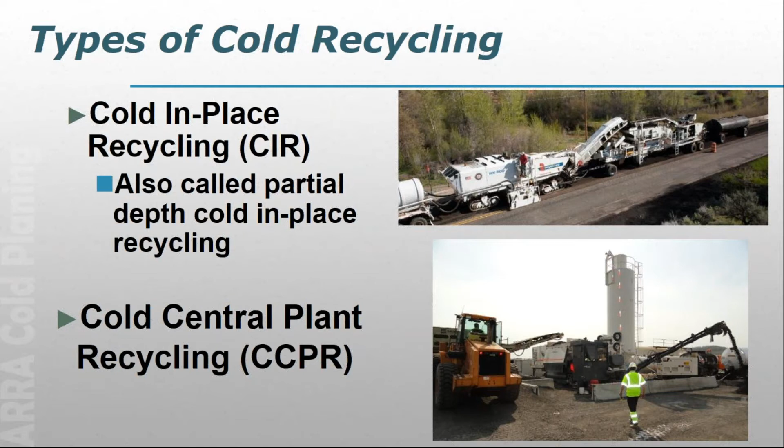With cold central plant, we're taking the RAP that's come off of a road and gone into a central location, and we can process it in a pug mill mixer, as you see down at the bottom, or out west where we have a lot of single unit trains, I've seen them just park a processing unit on the road and process it through there.

So most of the time when I get questions about cold central plant recycling, it's not so much what is the mix, but it's where or how do you use it. So that's really what I'm going to concentrate on in the next few minutes. But with cold central plant, we're going to take clean RAP and we're going to turn it into a new pavement mix. So a couple of keys is I want to keep that RAP clean, properly stockpiled and clean. The quality of that stockpile is going to influence the quality of your product.

More than likely, I'm going to have to crush that RAP. So I want to crush it down to a specified gradation. We're going to mix it with a bituminous recycling agent. It's either emulsified asphalt or foamed asphalt. This will be done at a central plant location. And then we're going to transport it to the laydown area. We're going to place it as a recycled mix.

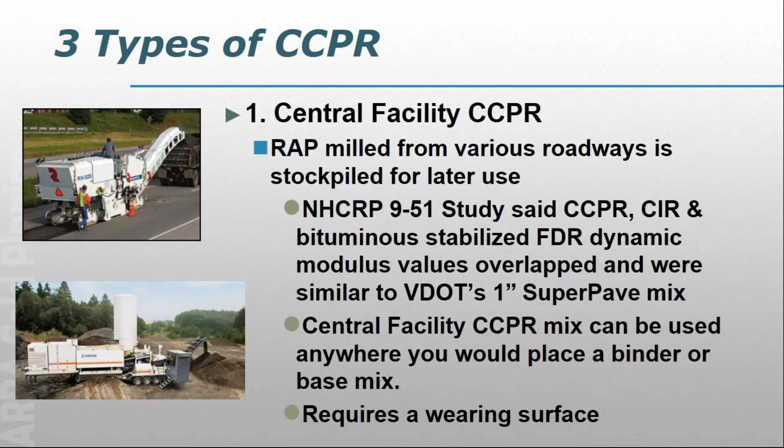We're going to place it just like you would a cold in place mix. Compact it, and like a cold in place recycled mix, it's going to go down a little higher air voids. It's going to need a surface treatment. One of the differences really, it's a little bit easier. You can fractionate your RAP if you want to try to change the gradation a little bit.

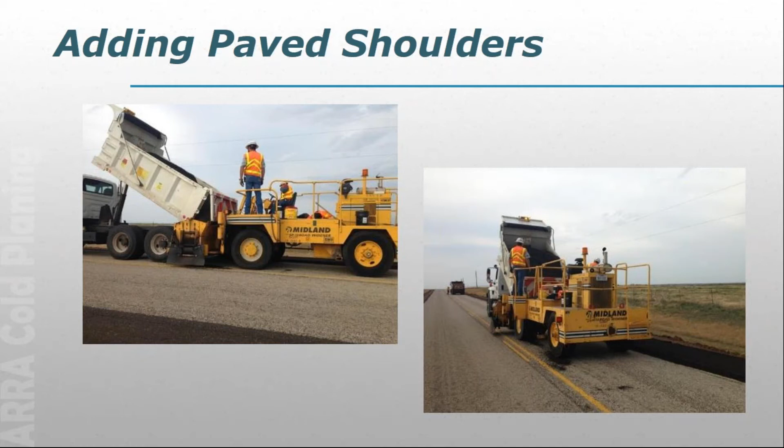You just want to be sure, especially when you're adding uncoated aggregate, that it's cost effective. And so the mix design will give you a good indication as to whether you may or may not need additional aggregate, but adding new aggregate is going to up the recycling agent demands. So you want to be sure that that's cost effective.

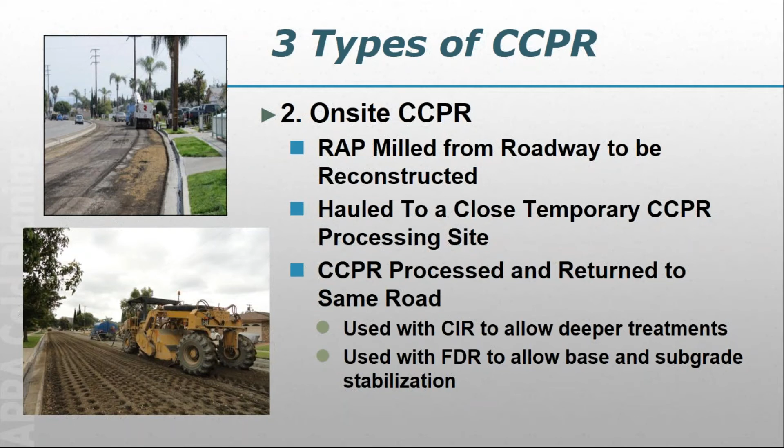There are three basic types of CCPR, so we'll talk about these and talk about where you can use them. The most common by far is what we'd call central facility CCPR. Many asphalt contractors and milling contractors have large stockpiles of RAP. So this RAP has come from various roadways and been stockpiled at their central location for later use. And it's becoming, especially in urban locations, a little hard to put all of this RAP back into hot mix. So CCPR is a really good use of this material.

As far as how does it behave, there was an NCHRP study 9-51 done by the University of Maryland, where they looked at dynamic modulus values of CCPR, CIR, and bituminous stabilized FDR. And their conclusion was the dynamic modulus curves of all three of these materials overlap. So they were very similar, and they also ended up being similar to Virginia DOT's 1 inch Superpave mix. What can you take from that? Well, central facility CCPR mix is going to behave like a binder mix or a base mix.

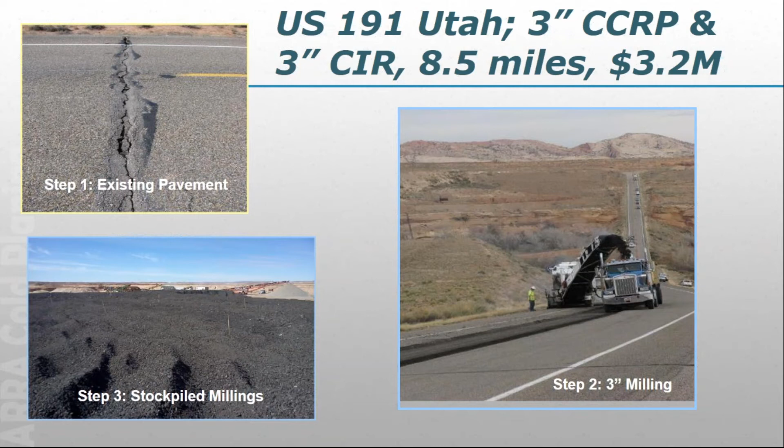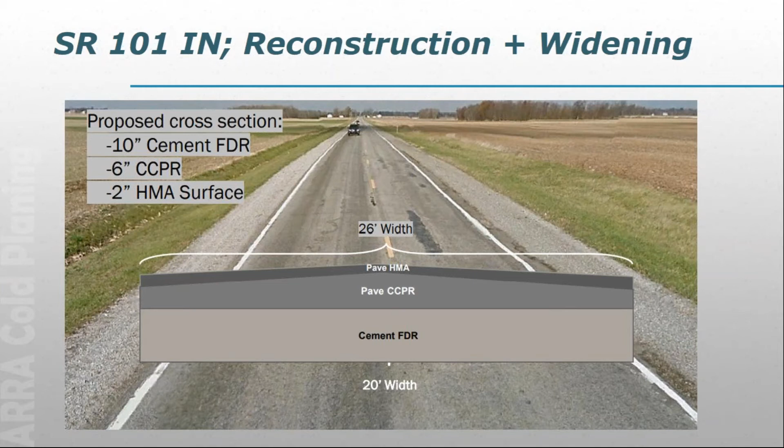So it can be used pretty much anywhere you'd place a binder or a base mix. One other place you can use this, if you have RAP in some more rural locations where you have a lot of gravel surface roads and you want a cost-effective way to upgrade these, you can place a central CCPR mix on these gravel roads, and they'll require a surface course. So depending on the traffic, you can go from a double chip seal or cape seal to an asphalt overlay. But this is by far the most common type of CCPR we use.

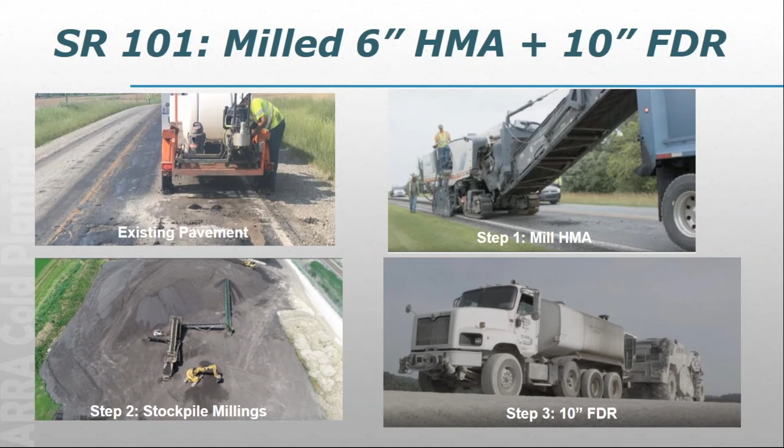Another place it can be used well: there are parts of the country where they built a whole lot of lower volume roads, not only without paved shoulders, but without shoulders. And we've seen this done in my home state. They have a program where they're adding shoulders to the road, and these CCPR mixes make a great shoulder mix. They come in place, very economical to add a paved shoulder to some of these roads.

Another type of CCPR is what we call on-site. There are some places where we can't get in and cold in-place recycle a mix. So we might want to do CCPR. So we're going to take the RAP that's milled from a roadway, the same roadway that's going to be reconstructed. We'll haul that to a close temporary processing site. We'll reprocess it and return it to the same road.

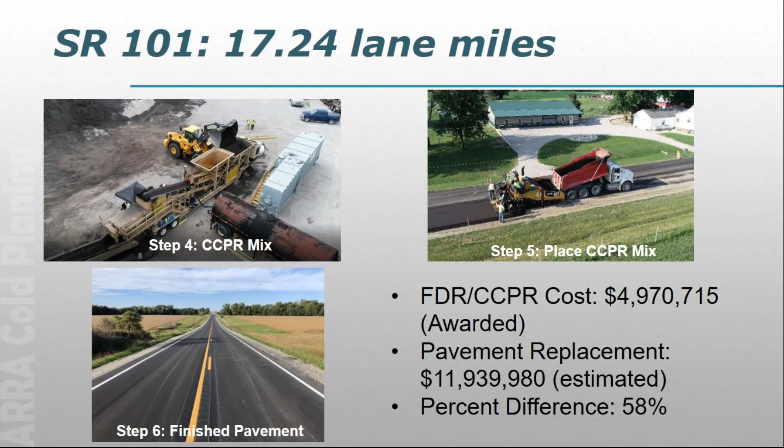We've seen some very innovative uses with this process. I've seen it used with CIR to allow much deeper pavement treatments, allow us to go 6+ inches deep, all in place. And I've seen it used with FDR to allow us to get down and treat the base and subgrade without wasting that asphalt material that we had to mill off to get down to that. So I have just a couple of examples to show you.

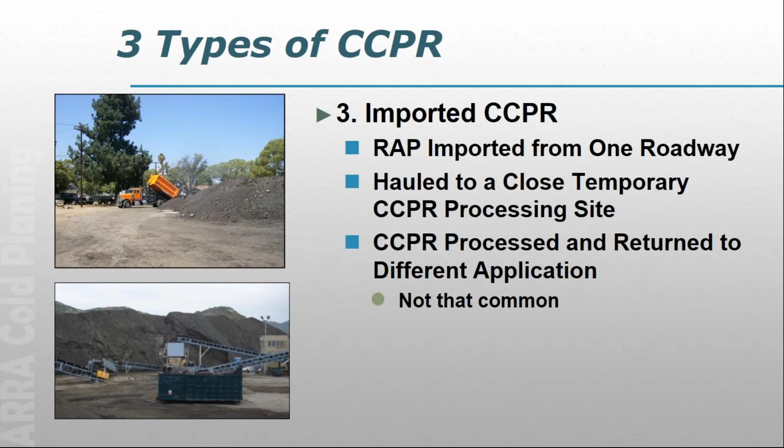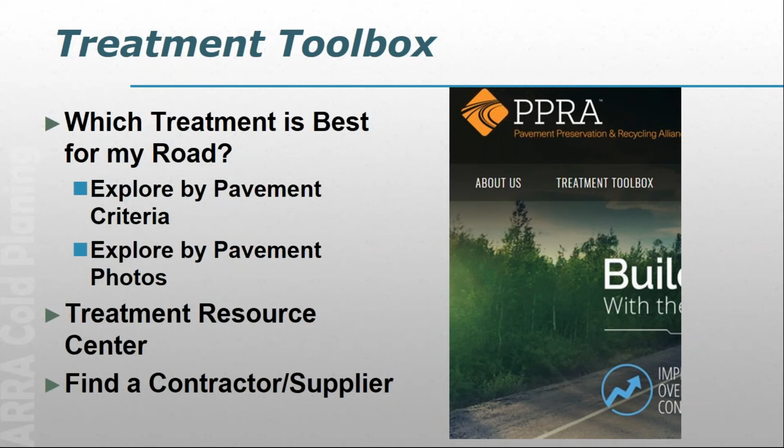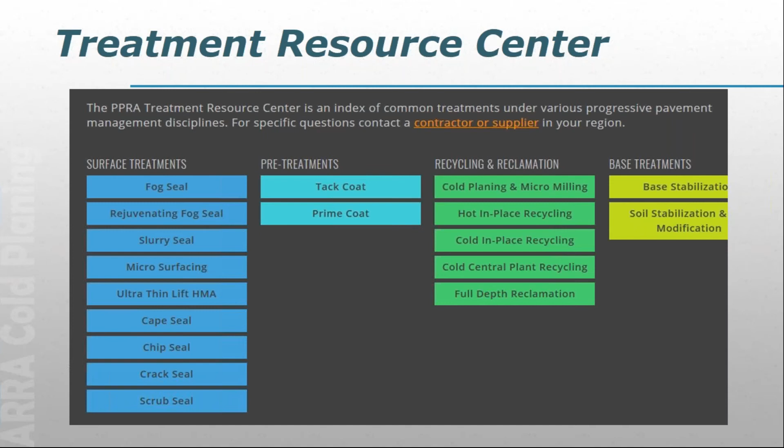This was an award-winning project out in Utah where they had an existing pavement, bad thermal cracks, quite wide thermal cracks. This was quite deep or thick pavement, quite a bit of deterioration occurring along the cracks. DOT came up with some money, a fixed amount of money that they could use to work on this road. So the proposal was to combine CIR with CCPR to allow them to treat 8.5 miles for just $3.2 million and to remove enough of that transverse crack or thermal crack that hopefully it wouldn't return back.

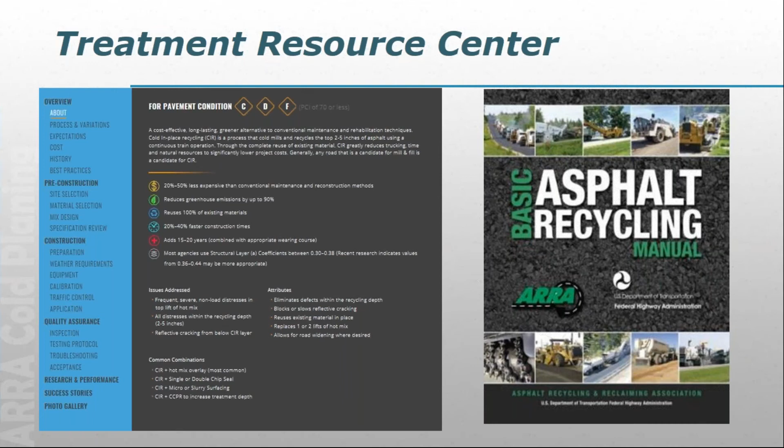So the process, they came in and they milled off the top 3 inches of the pavement and they hauled it to a central processing spot on the site. Then they came in and they performed CIR to another 3 inches. And so then once they finished with the CIR, they went back to the stockpile. They hauled their processing unit from the CIR train and set it up there and produced a CCPR mix, hauled it back out to the site, placed it and compacted it, and then put a surface treatment on it, I believe, but they were able to pave 8.5 miles at a little over $3 million. So a very economical way that allowed them to do a deep treatment by combining CIR with CCPR.

The other example is we have a lot of pavements where we need to get down and fix the base and subgrade. So they either need base stabilization or base and subgrade stabilization. So this was a project that also needed widening. The existing pavement was only 20 foot wide. It was in an Amish area, I believe, where they had horse and buggies going by and not a lot of room to drive around and pass these slow moving vehicles. So they wanted to rebuild this pavement and widen it, make it 26 foot wide, pave shoulders. So the proposed section was to come in and do 10 inches of cement treated FDR, full width.

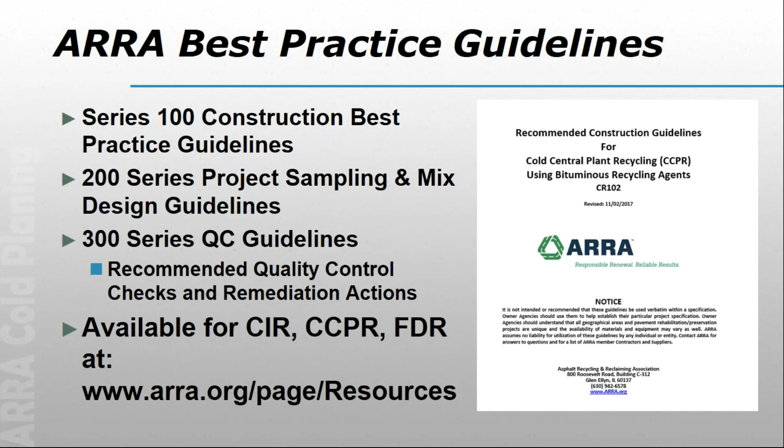They trenched out the material on the sides and came in and did FDR on the aggregate base, and I believe they got into the subgrade and made a 10-inch cement stabilized FDR full width across there. Processed the CCPR mix, and there they're using a pug mill. Hauled the CCPR mix back out on the road, placed and paved that, and then put, I believe, 2-inch HMA on the top of it, and you see the finished pavement.

The contract to do this was 17.24 lane miles at just under $5 million, and the engineer's estimate of a more conventional replacement was nearly $12 million, so a significant cost savings and an innovative way to do something with that material that you've had to mill off to get in when you needed to treat the base or the subgrade.

The last type of CCPR, it's not used that much, but it's an imported CCPR, so we're going to take RAP from one roadway, haul it to a close temporary site, process it, and then immediately return it to a different site where it might be needed. Not that common, but it's been done a few times.

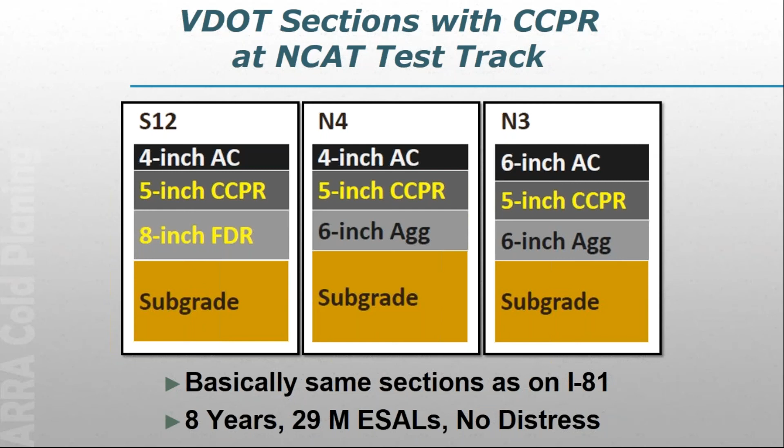So for just general information on a cold central plant recycling mix, again, you have two options. You can get a copy of the basic asphalt recycling manual, or you can go to roadresource.org. If you go to the treatment toolbox, this time we're going to go to the Treatment Resource Center. And if you were to click on the Treatment Resource Center, it would list all the resources. And again, mine are the ones in green and yellow. And if you wanted to know about Cold Central Plant, you could click on that. And this would be the home page that you would see under the Treatment Resource Center.

It's basically kind of a condensed or the Reader's Digest version of the basic asphalt recycling manual. The entire manual is over 500 pages long, so it's quite comprehensive. But for each one of these treatments, you can get an overview. You can get pre-construction information, site selection, material selection, construction information, preparation, weather requirements, equipment calibration, etc., quality assurance issues, troubleshooting, inspection and testing. We have a few research and performance studies and success stories and a photo gallery as well. So it's quite comprehensive, an excellent source of information on just what is a CCPR mix.

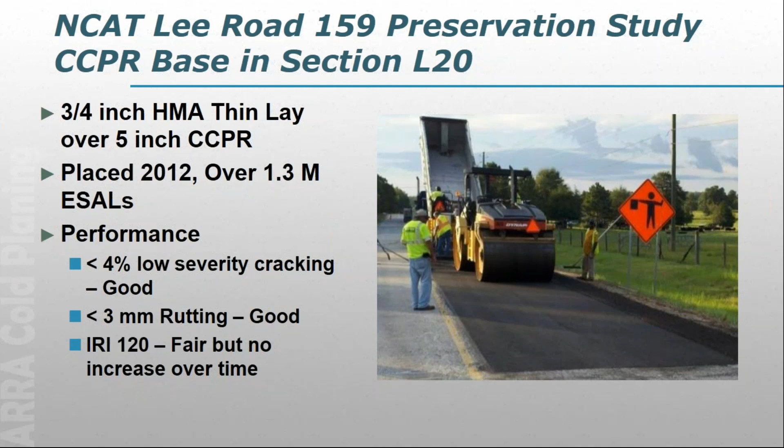The other thing that we have, ARRA has put out a set of best practice guidelines. And so there's a 3 series. There's a 100 series, a 200 series, and a 300 series. The 100 series is basically a best practice guideline. It's written in specification language as kind of a guide specification with notes to explain things further when there's more than one option. The 200 series is project sampling and mix design guidelines.

We go through and give you some tips on sampling the road to determine not only what's there and if it's a suitable candidate, but sampling for mix design. And then we have our mix design guidelines. Jason told you about the AASHTO provisional mix design procedures that are out there. They're actually based on the ARRA's mix design series. And then the 300 series is contractor QC guidelines, so recommended quality control checks for one of these processes, and it has remediation actions if you have some distresses that show up.

And these are available for CIR, CCPR, and FDR. They're available on the ARRA webpage, so that's www.arra.org/pages, and under the resource section, there's a folder that says guidelines, and you can click on there and you can download them from there.

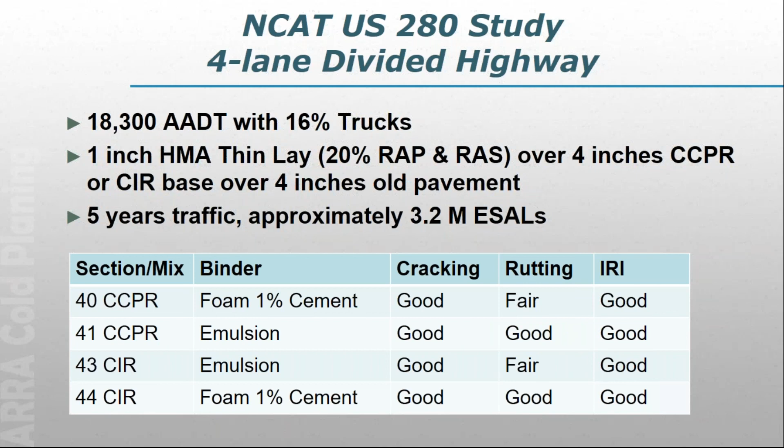As far as performance, Virginia DOT has kind of led the country with the amount of CCPR mixes they've put down. So they reconstructed I-81 several years ago and used a combination of FDR, CCPR, and CIR. And they put these same things down at the NCAT test track. So these are the same sections that were down on I-81. The FDR section had 5 inches of CCPR and a 4-inch asphalt overlay. The other section had a 4-inch and a 6-inch asphalt overlay over 5 inches of CCPR and 6 inches aggregate base. They've been through 3 complete cycles at the NCAT test track.

That's 9 years by now. They had approximately 30 million ESALs. The S12 section with FDR, they've decided that behaved as a perpetual pavement. The other 2 sections made it all 30 million ESALs with only minor distress. They were beginning to show distress though, and have been taken out of service. But 30 million ESALs is quite a long time.

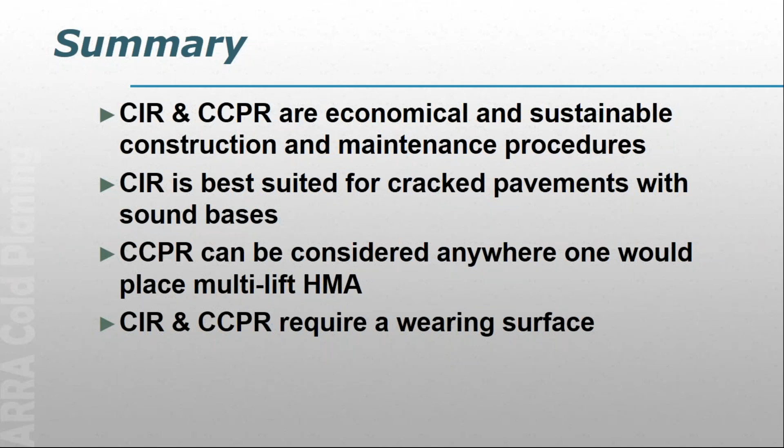They perform quite well. If they're put on a CIR and CCPR, they will perform quite well, given an adequate base and overlay for the traffic. So that was the one extreme for an interstate type pavement. The other extreme was the low volume roads.

So on the NCAT Lee Road 159 pavement preservation study, they had one 100-foot test section left over. So Buzz Powell decided to put down a 3/4-inch HMA thin lay over a 5-inch CCPR mix. This was placed in 2012. One lane, there's a rock quarry and an asphalt plant at the end. So coming out, they have a good record of loaded trucks, how many and what they weigh, and coming back in, they're empty. So they have good traffic records.

I need to update this. They've probably had about 1.5 million ESALs by now, and the performance has been excellent. Less than 4% low severity cracking, less than 3 millimeters of rutting. The IRI is high, but it's a series of 100-foot sections, so it's kind of hard to build a smooth pavement. But the good news is the IRI has not increased with time. So it's performed quite well in a low volume situation.

So that led to the 3rd test track, and this one was put down on US 280. We saw what it would do on an interstate type pavement with a really good base and a 4 to 6 inch asphalt overlay. We saw what it would do on a low volume road with a 3/4 inch thin lay. And so the question that came up on this one was, how will it perform? How much can it actually take before we start seeing distress?